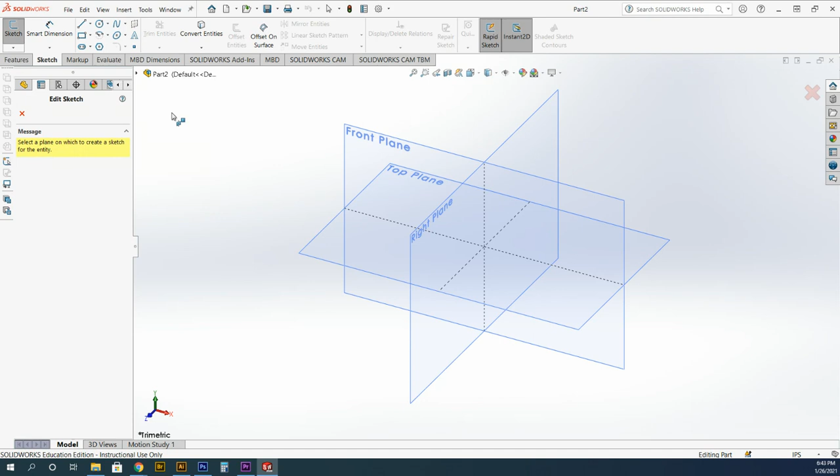We're going to start with a sketch on the top plane because it's going to be sitting flat on its back on the plate in the 3D printer. The first thing I'm going to do is put in a center line, and it's going to be for construction only, so it won't be seen in the drawing. I'm going to start at the top of the page and come down.

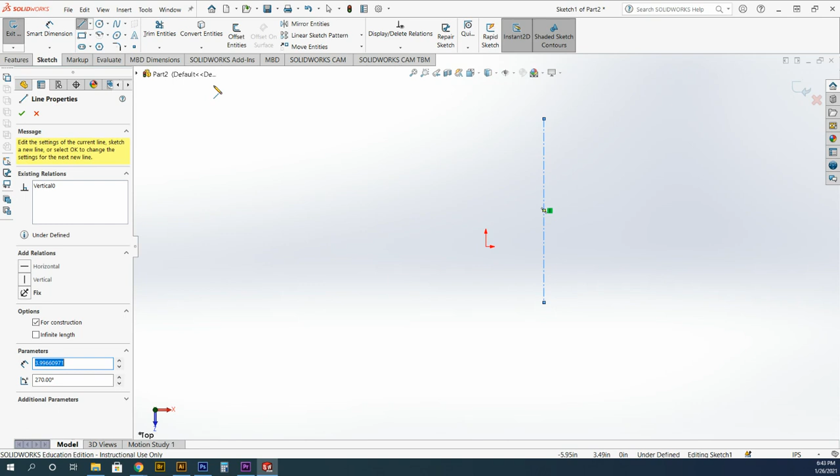Now my tag is going to be 2 by 2, so I'm going to get the smart dimension and go from the line to the origin and make that 1 inch.

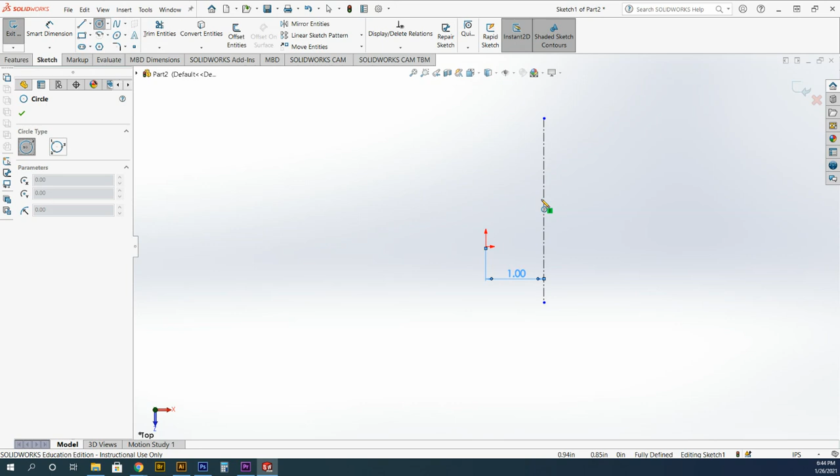Next, I am going to do mine circular. So what I'm going to do is take my circle and draw a 1 inch radius.

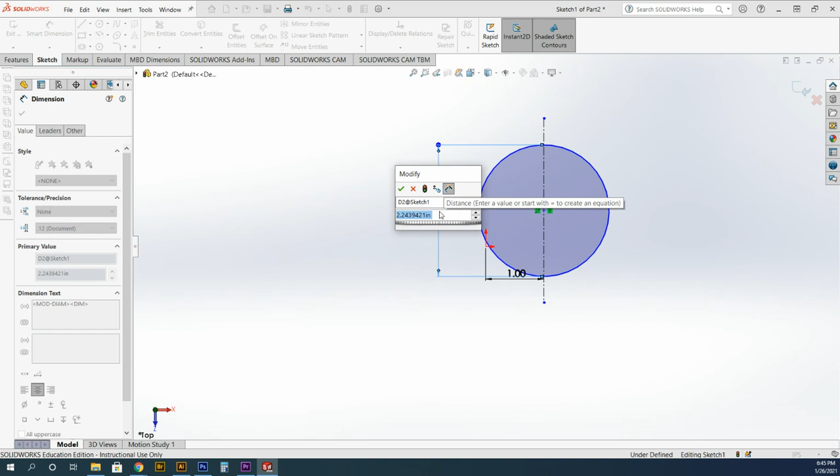You don't have to hit this right on the button because you're going to have to dimension it anyway. So you can go to the smart dimension, touch the corner, and this is going to work for lines or everything else, just like this. Touch the corner, click on it, and you'll get your dimension lines and extension lines coming out. This one's a little bigger, so I'm going to left click, it'll turn black, and then you'll get the modification window. I'm just going to go 2 inch diameter, hit the 2 and hit enter.

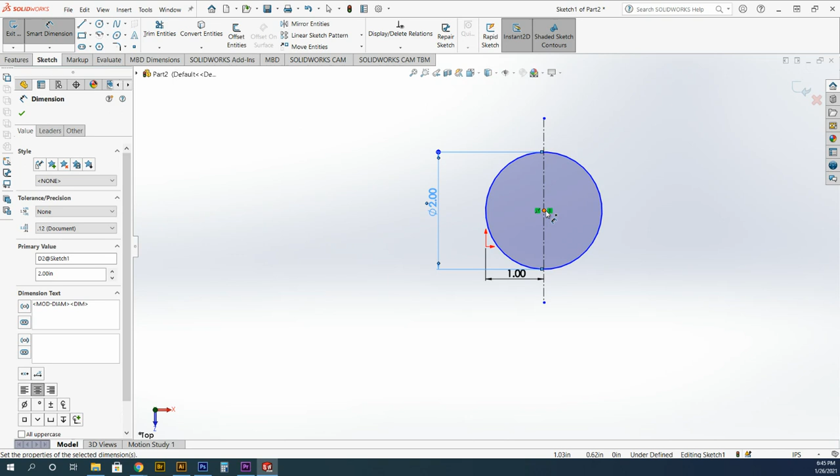So now my diameter is set at 2, and it's 1 inch to the center line. Now I want to go to the center point and go over to the origin again, and pull it over to the edge here and do the same thing.

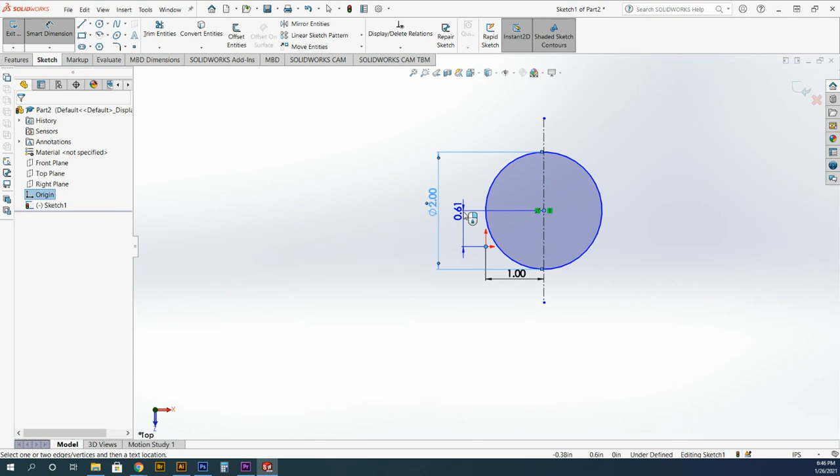Left click and it'll turn black, you'll get the modification window, and I'm going to go 1 inch up so that my tag is now centered in the drawing. You'll notice that everything is black now and my drawing is fully defined. You want to make sure that your drawings are fully defined so that the program will know where everything's going to be, and that's going to be more important as we move along.

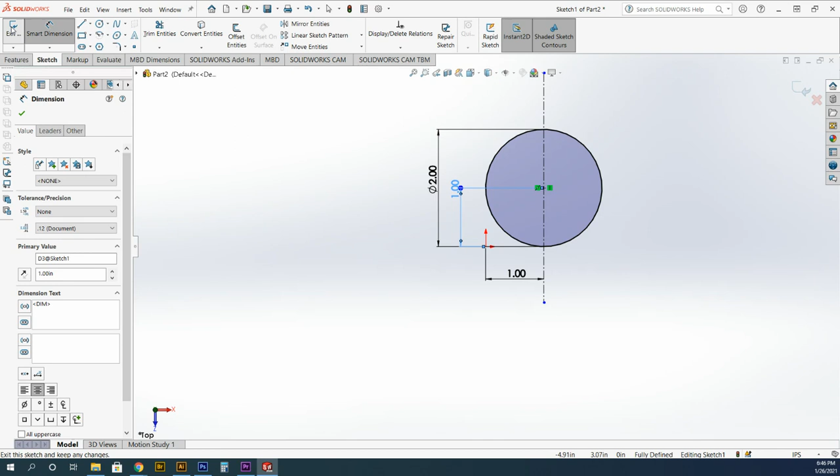So next, once it's fully defined, we're going to exit sketch, and now we're going to extrude our piece. We'll come down to features, up to extrude, and it's going to turn to an isometric drawing, and I'm going to extrude this up 1/4 inch.

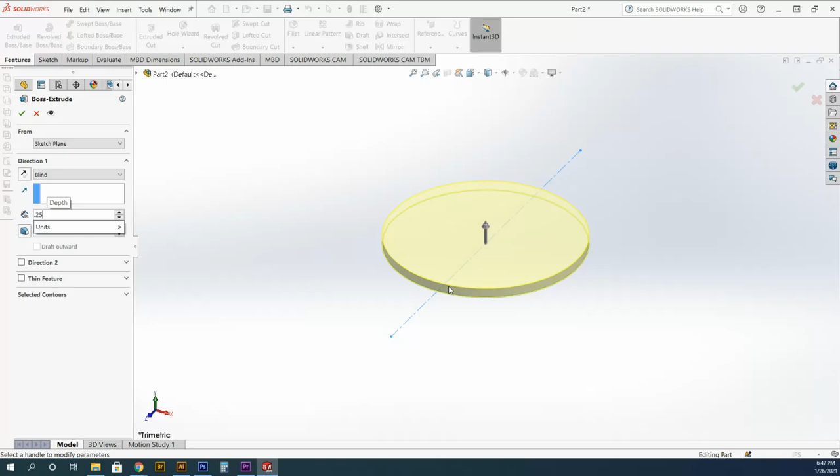It's defaulting to 1/10 of an inch, so I'm going to move it up to 1/4, 0.25. You'll see the little arrow, and the yellow is a preview. I'm going to hit the check mark, and there's our piece.

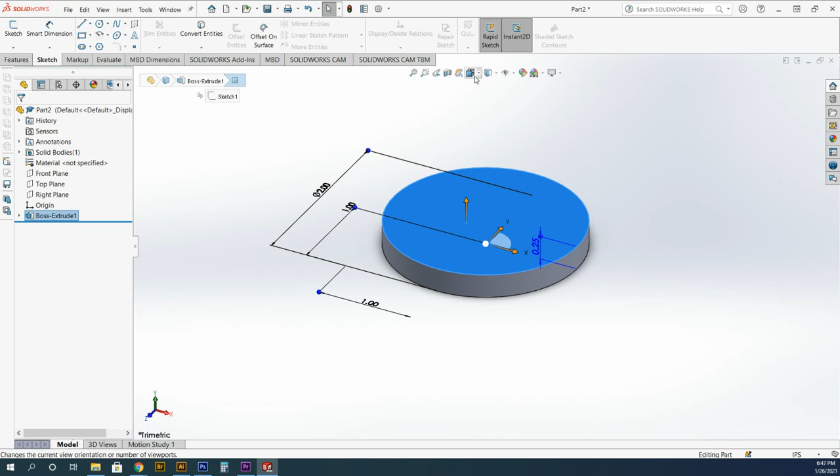I'm going to go and touch the face and click on the face because that's where I'm going to be sketching on next. I'm going to go back to sketch, and then come over here to my view orientation. Now I want to go back to the top view.

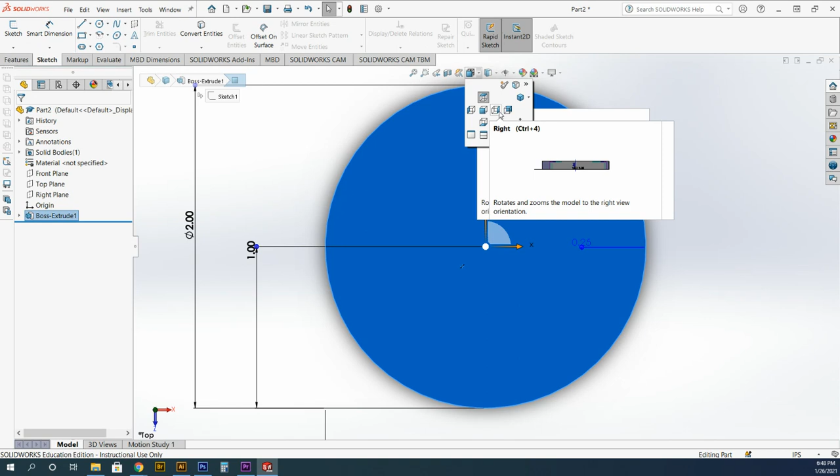Most of the time you'll use the top view, the front view, and the right side. The other ones are nice if you're going to be sketching all over the piece. Also, over here, you'll get isometric, dimetric, and trimetric.

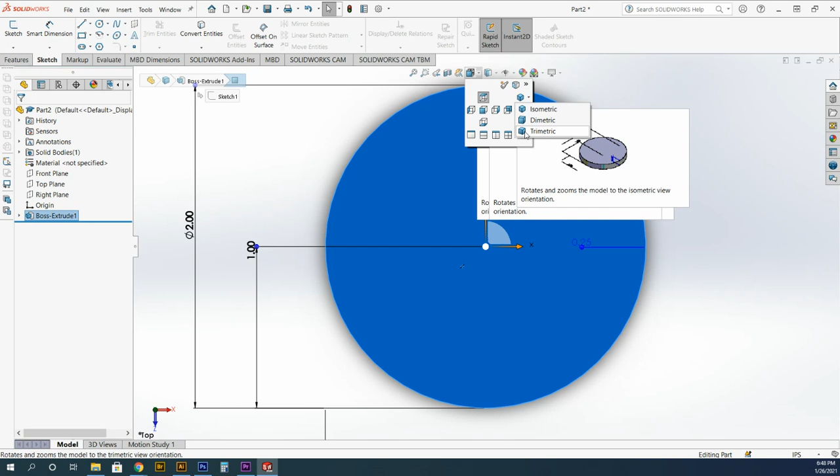In isometric, all your horizontal axes are going to be drawn at 30 degrees. In dimetric, the front face stays at 90 degrees, and as you move back, it'll be drawn at 60 degrees. In trimetric, the front's drawn at 60 degrees, the horizontal axes are drawn at 60 degrees, and the right side's drawn at 45 degrees. So that's the difference between the three.

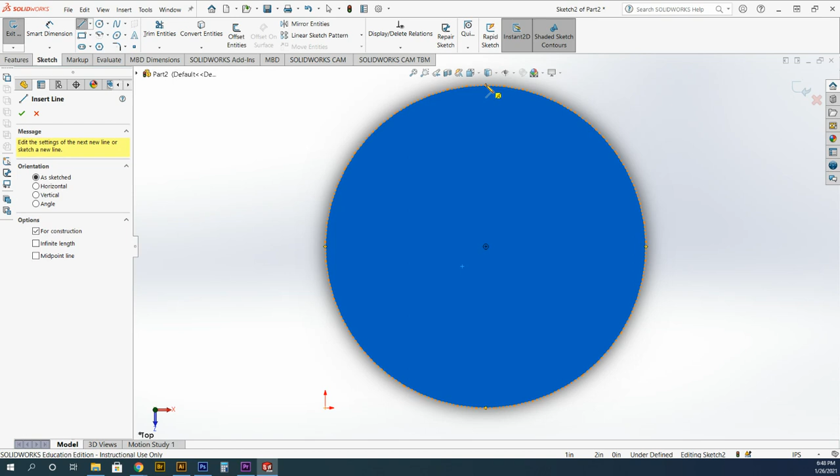So we're back on the top view. First thing I'm going to do is grab a center line, make sure it's still marked as construction, and you'll notice the little orange diamond at the top - that's the center point of the top of the circle. We're going to draw a line straight through the bottom and click. Next, I'm going back to my circle.

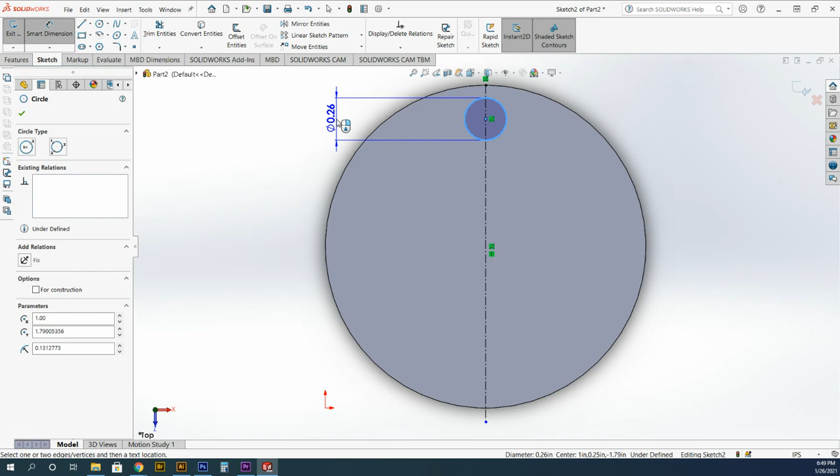I'm going to draw a circle and open it up to a radius of 1/8 of an inch, or 0.125. It only goes down to the 100th of an inch rather than the 1,000th, so when I go to my smart dimension and click on the circle, now I can go to 1/4 of an inch, which is 0.25, enter. So we're at 1/4 of an inch now.

I want to stay in the smart dimension. I'm going to go from the center of the circle to the edge, come out, and make that 0.25. You'll notice again that everything at this point is fully dimensioned, so we're ready to go there.

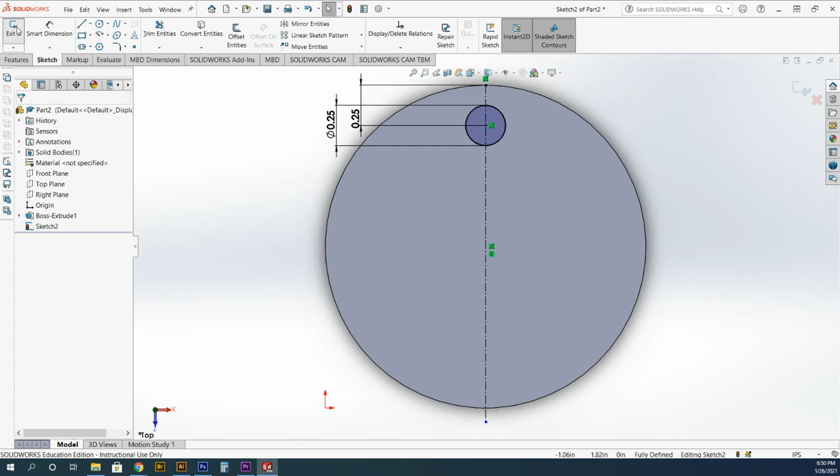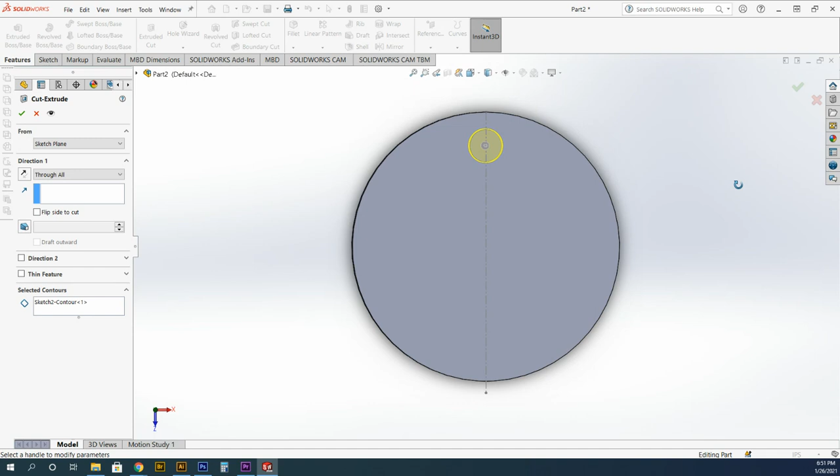We're going to exit sketch again and go to the features, and now we're going to cut the hole through for our key ring. I'm going to go to extrude cut, and the inside's highlighted here. I want to make this a through cut. If we turn this, you'll see that the cut's going through the piece, and you can see the hole going right through our piece now.

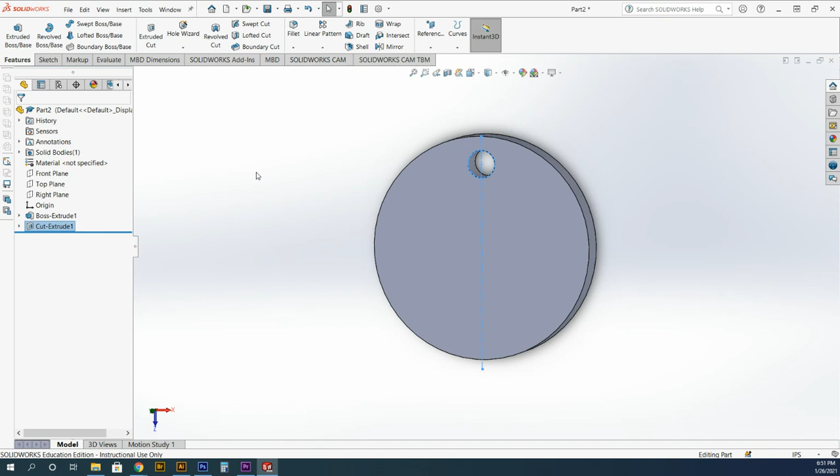I think that's where I'm going to end this one for the time being. Let's put the fillets on it. I'm going to go back to the top view, and then back to sketch - actually, maybe I'll stay in features. I'm going to go to fillet. Fillet is going to give us a rounded edge, while chamfer would be a 45-degree edge. So I'm going to go with the rounded edge.

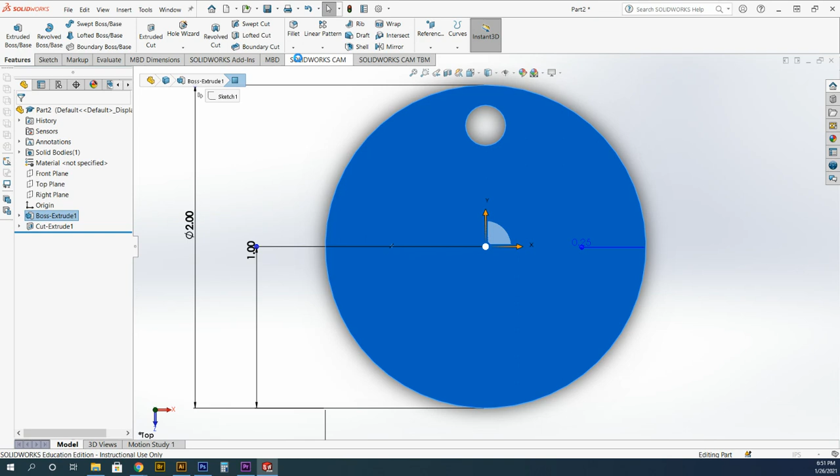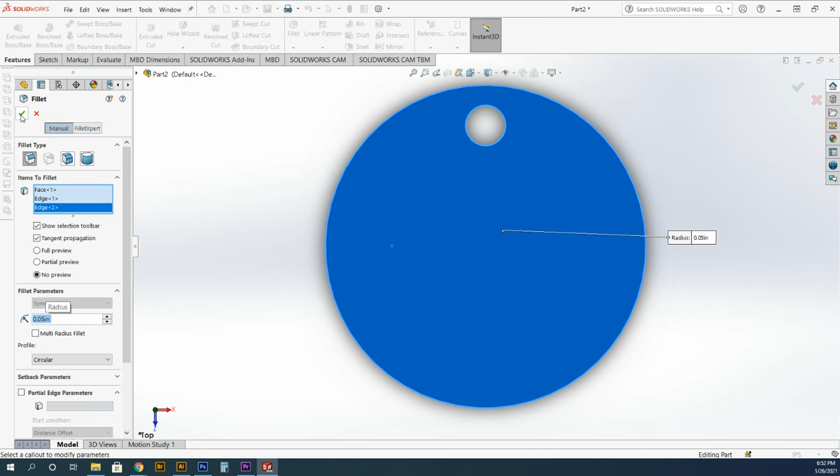And I'm going to take this edge and that edge, and I'm going half of this 1/10 of an inch, so I'm going to go 0.05. I just want to take the corners off of that. We'll hit OK, and you'll see that the hole's nice and round, the edge is rounded, the hole's rounded.

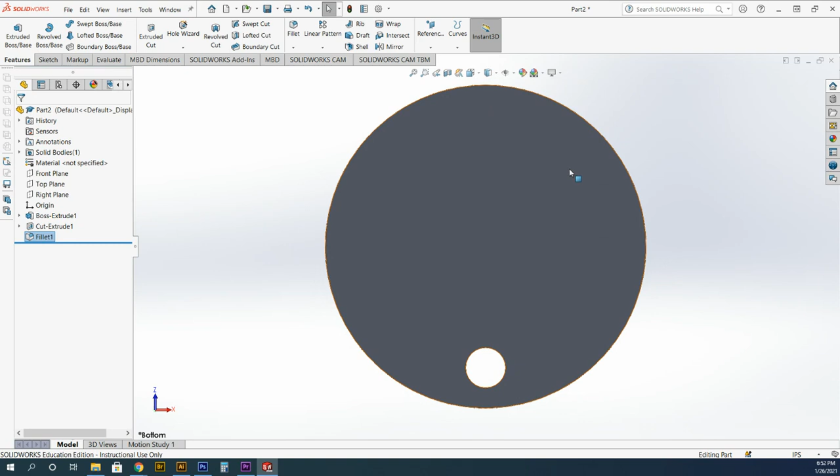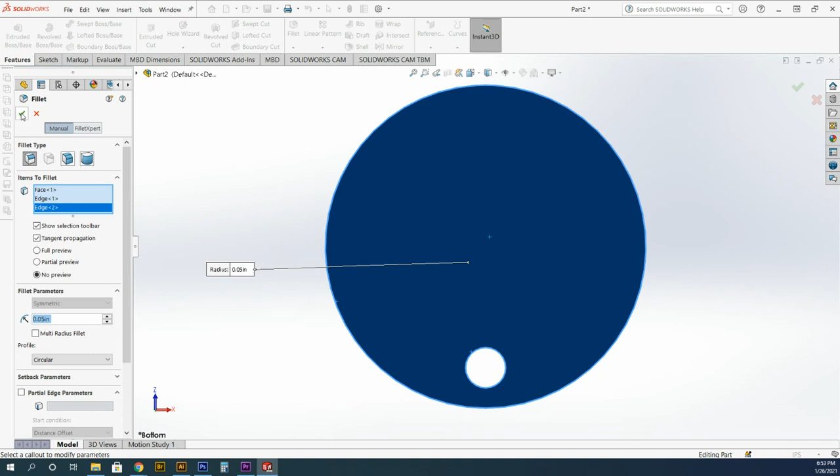Then we're going to go back up and go to the bottom side, and do the same thing. Select the face, get the fillet tool, select the edge, select the hole. We're already at 0.05, hit the check, and now both sides are filleted. You can see the nice round edges as we turn it around.